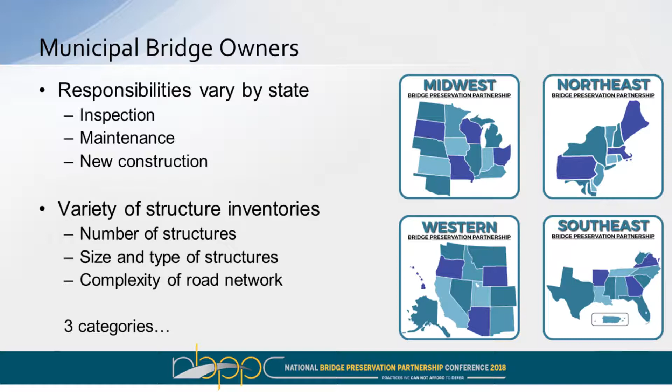In some states, the counties have absolutely no responsibility for bridge maintenance, such as in my home state of Virginia. And then you heard Jason mention a minute ago in Michigan how the combined inventory of county bridges exceeds that of the state-owned inventory. So their ownership and their responsibilities vary widely, as do their inventories themselves, both in size of inventory as well as the complexity and the type of structures and even the road networks, whether it's a real urban environment in a city or a very rural location out in a county.

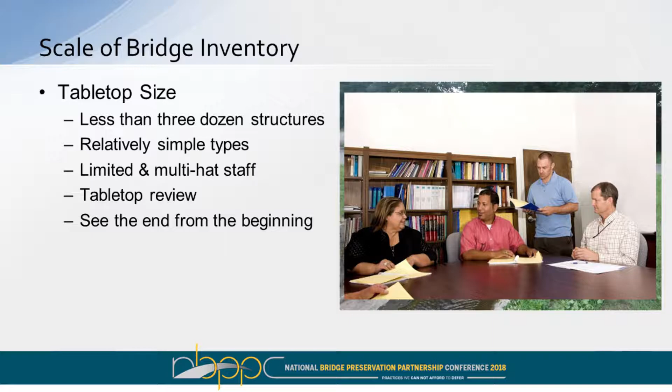But in my experience of dealing with the smaller local bridge owners, I have come to see their inventories categorized in three types of categories. At the small end of the spectrum, there is what I call the tabletop size inventory. I'm somewhat arbitrarily pegging that around three dozen or less structures, but these are the smaller inventories, and they also tend to be the smaller type of structures. These organizations tend to have a limited number of staff in general who are dedicated to the management of those, and they tend to be folks who are wearing other hats.

There may be a position which has the title of town engineer, but you may find when you work with them that that person also serves as the postmaster or the public works director, or even, Jason says, elementary school teacher. So these are folks juggling bridge inventories on top of a lot of other things. I call it the tabletop size of inventory because in these cases you're able to spread out the files for these bridge inventories all on a conference room table and see and understand the condition of the entire inventory with one sort of brain shot.

And when I'm in their offices, I see them gathered around the table, and you can see the end from the beginning, so to speak. They can understand their needs in the big picture all at once, and so setting priorities tends to be fairly straightforward for those type inventories. At the other end of the spectrum, on the large side, is what I'm calling the agency size of inventory. This would be the hundreds to thousands of structures. DOTs almost all fall in this category. Not that many localities, but a few sizable groups do have inventories quite that large.

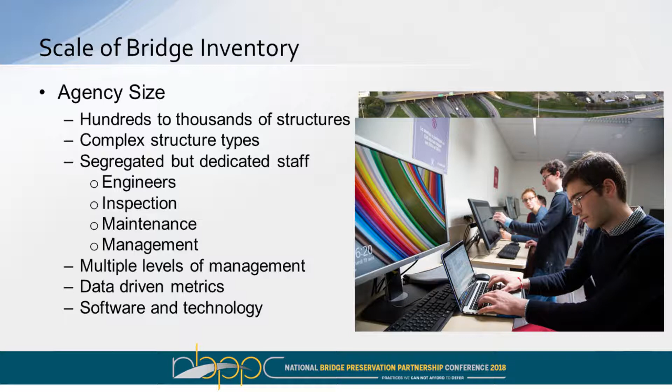In that case, because of the large inventory, they tend to have staff that are divided into departments, and they have dedicated functions for their purposes. They have an engineering group, an inspection group, a maintenance group. Their management tends to be structured into many different levels and layers, and they tend to be very heavily driven by metrics. So if you visit their office, you'll see a lot of technology employed. They're using a lot of computer-based evaluations to set their priorities.

They can tell you that in District 3, 87% of the joints are in condition state 2. You know, they have a lot of numbers at their disposal and a lot of data to use in the decision-making process, and they take advantage of the advances we've made in the last few years in data management, and so they also are pretty effective at their priority setting. But the group I really wanted to talk about today is the group that falls in the donut hole middle of those two. This mid-range group of inventory owners who have that few dozen to very low hundreds, who have quite a range of complexity perhaps in their inventories.

And they have staff that are assigned to deal with this for sure, and they're full-time staff, but usually not many people who are full-time dedicated to the bridge management function alone. And they also struggle with a problem of staff continuity because there's no full-time dedication to the bridge management function. Folks who are trying to move up the career path end up switching to another department or another division, and so they lack the long-term vision from having long-term continuity of staff.

They also suffer from having some non-technical management, reporting up through public works directors. That's kind of technical, but once it gets to city managers, town councils, those kinds of things, you're dealing with folks who don't fully appreciate the topic that they're trying to manage here. And they compete with non-transportation demand. So you've got the bridge preservation and repair needs competing against the new high school or the new sewer line project or the library upgrade or whatever goes on.

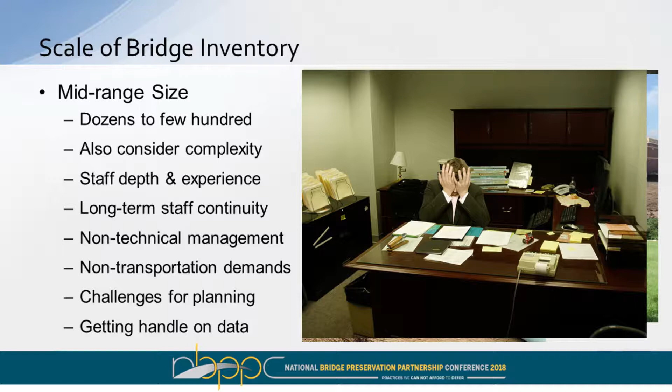So when I'm in their offices, I sense a lot of frustration and a lot of not being quite sure what to do about this. They have access to a lot of data, but sometimes they're not really collecting full element level inspections, for example. They don't have access to the software for doing the kinds of evaluations of that. So they feel like they're stuck in a spot. Their inventory is too large to spread out on a conference room table and get their hands around it, but not quite big enough to justify the use of some kind of full-blown data metrics. And I found that they were needing help getting their handle on this.

Now, let's take one sidestep on the question of bridge data management and remind ourselves how far this has come, because in the last 50 years, our current existence has evolved out of a number of bridge tragedies, tragic collapses that motivated legislation and policy. The 1968 Federal Highway Act kind of kicked it all off after the Silver Bridge collapse, and a few years later there was the development of the National Bridge Inspection Standards.

If you go to a file now of a bridge and you flip to the back and you find that first inspection report from, say, the early to mid-1970s, it's probably a single page. It was a typed form perhaps, but it was filled out by hand, maybe using no more than 50 words. And what description there was in quantifying the condition probably said nothing more than good, fair, poor. And as time has moved forward, we got into condition states. Now instead of 3 to choose from, you can have quite a few more, but there's still a single numerical value.

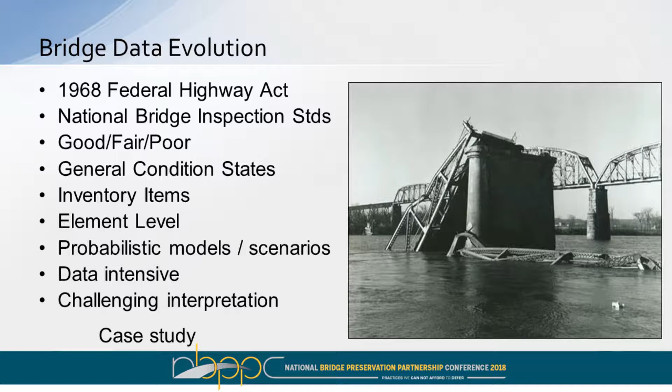Fast forward now to today, we have all of the element level data where every individual element can have several different deficiencies, and each deficiency can be ranked among several condition states. So the amount of data in this industry, like so many others, has exploded with technology, and there's loads of data out there. It's a very data-intensive process, or it can be today, but these folks with that donut-size inventory were struggling with how to get their hands around it because they didn't have the resources for the software and for the staff to invest in that sort of evaluation.

So the case study that I wanted to present to you today is one such municipality with that type of inventory. That inventory, which, by the way, I was trying to tell my boss, I wanted to call it the smallmouth bass inventory, because I remember as a kid growing up fishing with my dad, I would catch a fish which I was pretty proud of on account of not having much success at that normally. And then after pulling it onto the boat and showing it to him, he would point out that it didn't meet some criteria that the game warden had established for keeping the fish. And so I was stuck there between being big enough to be proud of, but not big enough to take home and show mom.

So that's kind of how they are. They're in that stuck boat of not small enough to manage on the tabletop, but not quite big enough to manage in the full-blown computer management. So the municipality that I'm going to case study here is the city of Roanoke.

This is a city located in the southwest part of Virginia. They are a fully incorporated municipality, which in Virginia means they have 100% responsibility for the bridges within their boundaries, with the exception of interstate bridges.

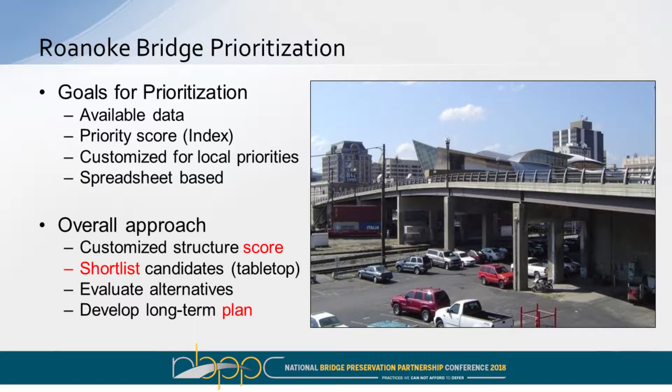So the overall approach we took with them was to help develop this customized scoring system that I'll tell you about here in a moment, use that scoring system to rank the projects, but recognizing that a scoring system this simple couldn't be perfect, and so we consider that scoring to be a shortlisting of candidate structures, and then have a second phase of evaluation of those candidate structures for actually deciding which bridges deserve the priority, and then using that to develop a long-term plan for them to work towards year by year.

So first, the score system. We'll talk about how that came to be. I'm going to have a little bit of equation-type approach to this scoring. It is naturally a mathematical exercise in a way, but the point of this talk is not really to show you the calculation itself, as if to say this is a good way to do it. The point is to show you how they customized their calculation to fit their needs and say that that is an approach that others could take as well.

So this priority index, as we came to call it, would be a single score that would rank all of the projects by their worthiness for priority. It would go from 0 to 1, 1 being the highest priority and 0 the lowest. And it would be a calculation that would give preference to structures that were in poor condition. Structures that were larger would get a higher priority number. Structures that had heavier traffic volumes would get the higher number. And then any structures with posted weight restrictions because of what that would mean to the local economy.

So here's the equation, the simple equation for this priority index: 1 minus the condition ratio on top and the importance factor on bottom.

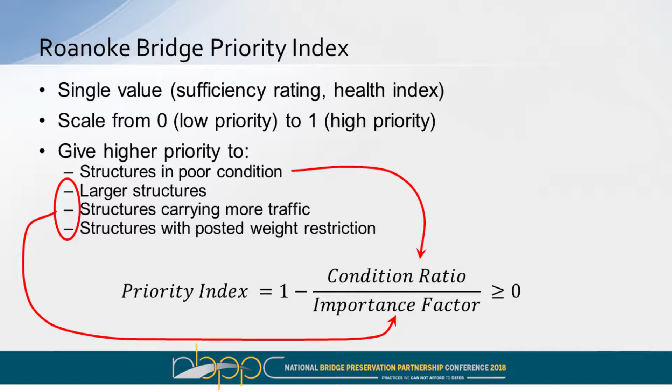And so you can see, speaking of the math side of it, a higher condition ratio will reflect a bridge in better condition. And so a higher condition ratio will result in a lower priority index. And then a higher importance factor, a more important bridge, if you will, will result in a higher priority index, and so in that way those two things are capturing what they wanted them to consider. The condition of the bridge then goes into the condition ratio, and those last three priorities that they wanted to make important for their locality, we're rolling them all into this importance factor.

So let's start with the condition ratio first. In order to do this calculation, if you want to put math to how to make a condition number, a single number for the bridge's condition, it first became necessary to assign a connection between the general condition ratings, which they wanted to use because they had that data already, the three main condition ratings, superstructure, substructure, and deck. They wanted to prorate those for the asset value, essentially.

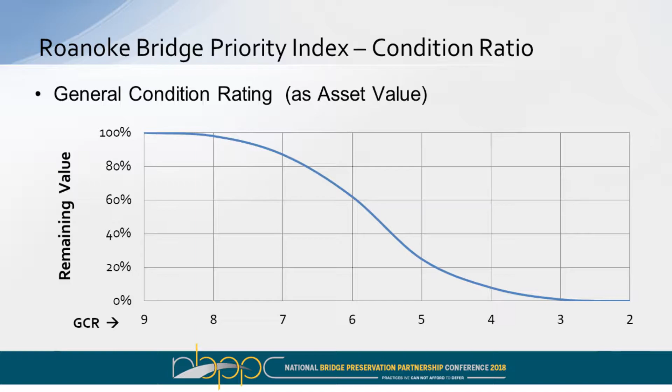So we came up with this curve that a condition rating of 9 would correspond to that element being completely valuable, and a condition rating of 2 would have no value left, and then they felt like the shape ought to be sort of nonlinear. And so, again, nothing magic about the curve, and others have done things like this before, but it just shows a variation between an element that's got its full utility and an element that has no utility left at all.

And this is important because now they can combine that with an idea of saying, for the entire bridge's value, how do you break out the three main components as contributing to the value of the bridge? And so, again, in their local preference, from their experience with maintenance and the kind of work they expected to do in the future, they wanted to weight the value of the three components of the bridge in this manner here, 30% for the deck, 45% for the superstructure, and 25% for the substructure.

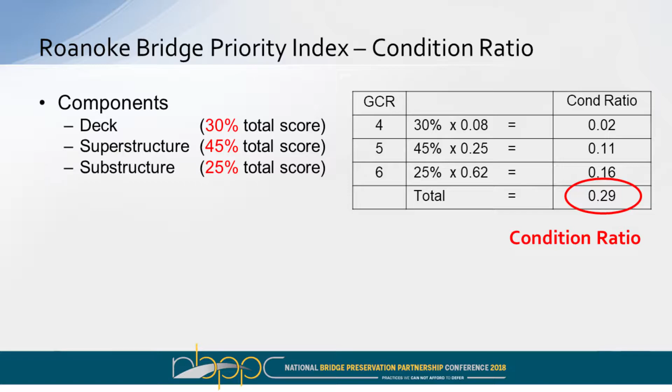Again, nothing to brag about that being particularly a right answer. This just reflects their local preference for the types of bridges they have and the types of projects they expected to work on, to put more weighting on the superstructure and less on the sub.

But combining those two then, you could say for a given scenario, let's say, of certain condition ratings on the deck and super and sub, with the weightings that they contribute to the total of the structure, and these three factors here would come off the graph on the previous screen, you can calculate individually and then sum up to the bottom this condition ratio. That would be a single number that tries to capture the condition of the bridge, reflecting the priorities that the locality has. All right, now remember then, so that was the condition ratio on the top.

Let's look at the importance factor on the bottom. In that case, they had three areas they wanted to highlight: the traffic, which will be represented by federal item 29, which is already on record for them. And in this case, the higher the ADT, the higher the importance. The bridge size, which they're going to represent as the plan area, length times width, both federal item numbers already on record. So a larger bridge would be considered more important.

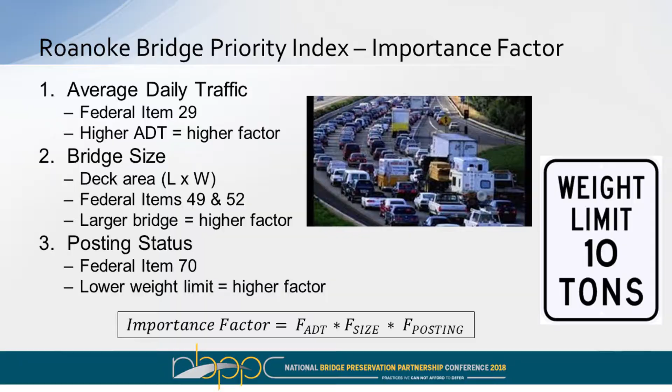They've seen from their experience that the larger bridge projects take longer to come to life, and so they wanted to give those an emphasis in that way. And then lastly, the weight restrictions, they want to capture by federal item 70 for the posting status, such that a lower weight limit deserved a higher priority. And they're simply going to mathematically multiply three factors together to get the combined importance factor. So let me show you what they did with these three factors.

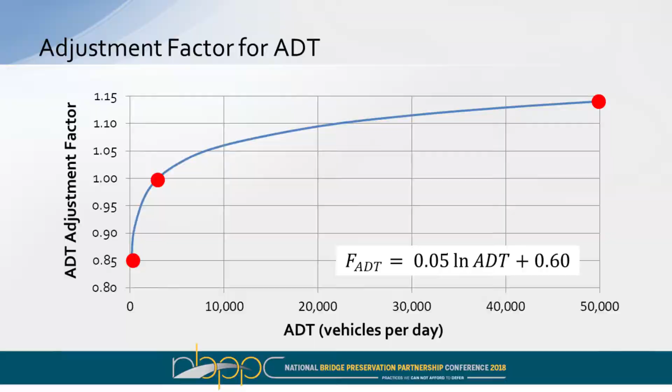For ADT, again, here's their local preference. They said, let's take our average ADT in town, which is about 3,000. Let's call that a benchmark of a 1.0 factor. And then talking to them, we developed that they felt like the highest ADT in town deserved a 15% markup, and the lowest ADT in town could possibly deserve a 15% decrease in that importance factor.

But because the average is not anywhere near the middle of the range, it's sort of a more logarithmic type shaped curve in order to achieve 15% at the high end, minus 15% at the low end, and 1.0 at the average. Again, nothing fancy about the equation to say it's the new answer, just this is how we fit a curve to the shape of their desires.

In the case of the size factor, they agreed to just simply having 1.0 for the smallest bridge and 10% for the largest bridge in their inventory. And then that's nothing more than an equation that just fits that scenario.

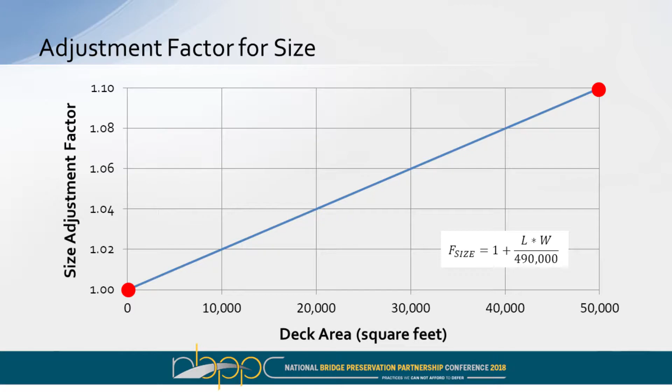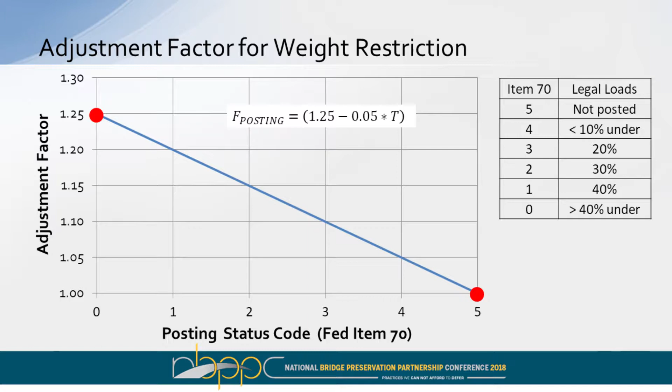And then thirdly, for the weight restriction, there is the federal item 70 in the coding that has 0 through 5 representing whether there's any weight restriction relative to legal loads, or if so, 10, 20, 30, 40, or less than 40% benchmark. And so using those 6 code numbers, just making correlation that with no weight restriction gets a 1.0 factor, and with the worst weight restriction deserved a 25% increase in the importance factor. So again, the same thing. Nothing about the equation that's fancy, just fitting to the shape of their local preferences.

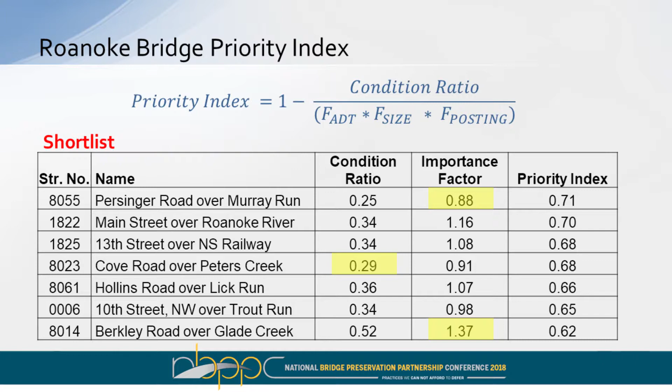And then thirdly, the bridge that was ranked as the top priority index, arguably the first for consideration in the projects, is still one that has a fairly low importance factor, but it was influenced by having such a low condition ratio. So it sort of accomplished the goal of melding, wanting to work on the bridges that are in the worst condition, but also work on the bridges that are most important to us in a relatively simple, data-based, objective kind of fashion.

But remember, I told you the first thing was getting the scoring, but the scoring isn't the answer. You can't take this list and just say, all right, we're going to start at the first one, then we'll do the second one and the third one, because it's a fairly simplified approach, and naturally there's going to be some results that are not necessarily in agreement with the intuition of the local agency.

So we considered it just a short listing, and then we found through our iterations early on that the 0.6 priority index value was kind of a cutoff line between projects that were worth considering or not. And through the reiterations of this process over time, that usually results out of their inventory of 100, about 10 or so bridges worth considering. And then we just go down through the list of 10 in the fashion of short list consideration.

We develop alternatives for each one, whether it's a repair alternative, maintenance work, rehabilitation, or complete replacement. Consider each of those alternatives, weigh out the pros and cons and cost estimates, and then use some judgment in there. So we're by no means trying to eliminate the value of human judgment, but basically what it does is it takes their inventory that was too large to get their hands around at first and lets this short list become their tabletop size inventory for consideration. And now it's down to a manageable size you really can wrap your brain around.

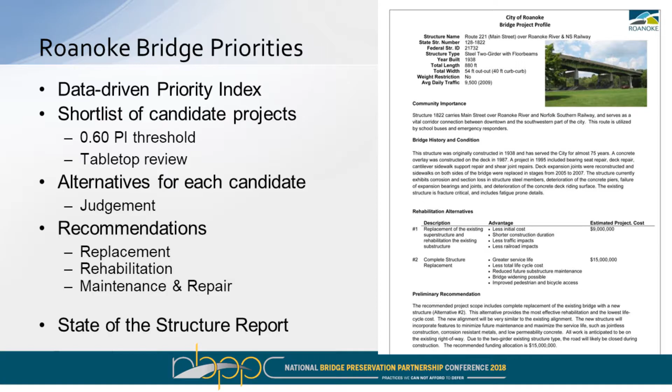So we went through the exercise of evaluating the alternatives, making some recommendations, produced this, they call it the State of the Structure report, that summarizes not only the results but the process. It even includes in the back a single-page project profile for each of the recommendations that has a little summary of the condition of the bridge, what alternatives were considered, and what's recommended going forward.

So they can use this tool not only for their data-driven planning purposes, but as a way of communicating to the likes of city managers, town council type folks who are not as informed with the process. It demonstrates to those managers a dedicated commitment to the data-driven process. It gives them a sense of confidence in the decision-making as well.

So with that data-driven planning, customized by the local values as I've demonstrated, and it's been easy to update for them as a follow-up activity, but still demonstrating the importance of the human professional judgment that definitely is not set aside as a part of this process, and that they were able to use that as a communication tool. So it's proven successful since the inception.

When we first started on this in 2011, published the first report in 2012, I think they've completed 7 projects and have several others in the works. So it's definitely working for them. Again, like I mentioned several times, not to say these are the equations for everybody, but to the localities, I would say the message is you could customize something like this to your own particular situations, your own inventory structure types, your own ADT posting situations. Get with your favorite consultant and work with them to work something up like that.

And for the state and federal folks in the room, like Jason did a fine job here before me, helping the localities where you can, whether it's technical resources, just advice, the kind of funding, helping them get through environmental processes, which are often a bogged down point. Whatever you can do to support them, definitely appreciated.